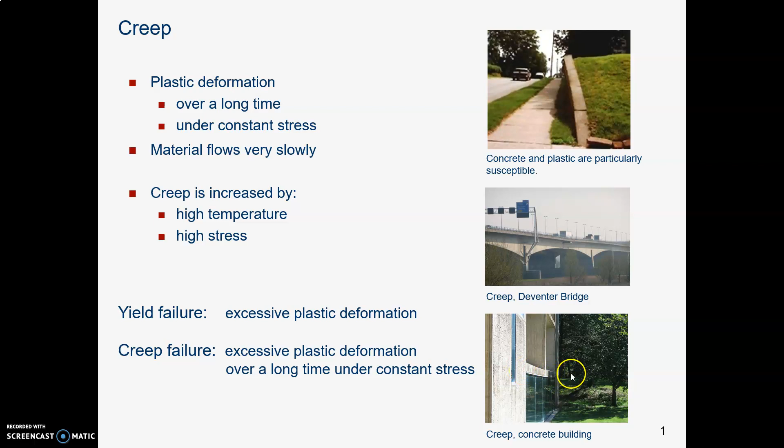So here is a photo of a bridge that is experiencing creep in the middle of the span. Here is a building with a concrete slab that is experiencing creep in the middle of the span.

An issue is thinking about what we're doing when we pre-stress a beam or we post-tension a beam. We're putting positive camber in that beam so it will kind of bow upward so that when we put a load on it, the bottom of the beam will be bent downward. The bottom of the beam will be in compression, which concrete likes, and all will be well.

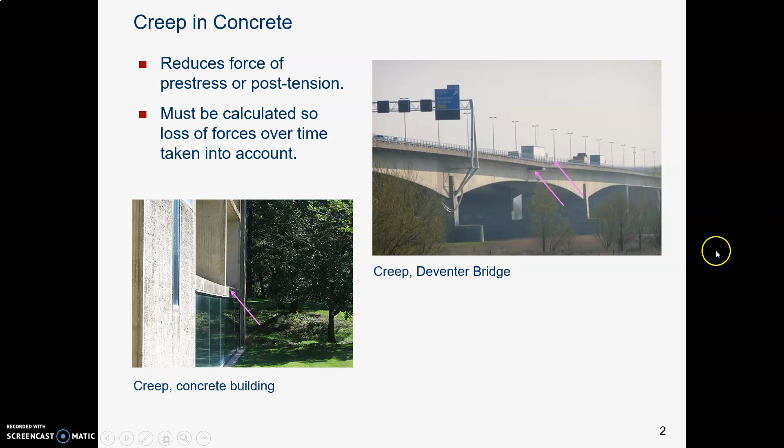Well, when you start to get creep, that sagging can counteract the good things that the pre-stressing or the post-tensioning did. And so your engineer will be calculating what is the likelihood of creep, how much of it will happen, and they will calculate how to offset the effect of the creep so that it doesn't overcome the good work that the pre-stressing and post-tensioning does. That's part of civil engineering, which is an interesting field.

Well, we're talking about reinforced concrete. So concrete is bad in tension and it cracks at the bottom. That's why we put in rebar. Also, as the beam is bent, it experiences shear in the middle of the beam, and we saw on a previous day that when things shear, they tend to shear at a 45-degree angle, and so engineers and then contractors locate their reinforcing bar to counteract those 45-degree shear impacts.

The most efficient way to handle that is with rebar, reinforcing bar, that's bent at a 45-degree angle, because that is exactly at 90 degrees to those shear lines. However, contractors often put in vertical stirrups of rebar spaced closer together where the shear is going to happen, because it's just easier to make. You know, that 45-degree is kind of sophisticated and you have to be careful. These stirrups, you can just bend a bunch of 90-degree angles and it's easier and therefore more economical, because we pay for labor by the hour.

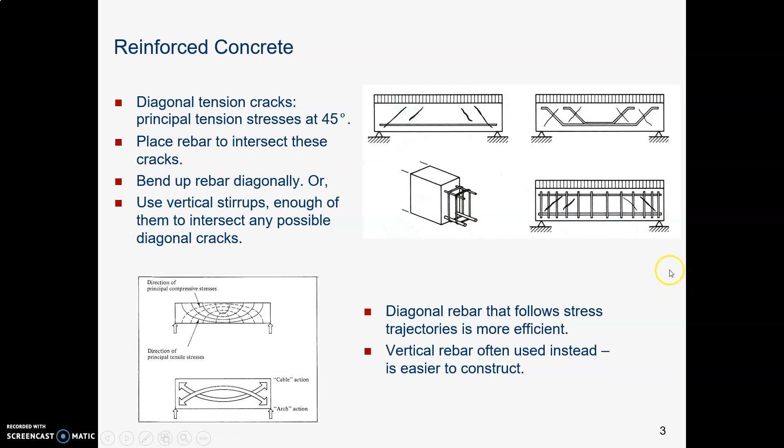It's interesting to think about how concrete is brittle and steel is ductile, thinking back on a previous day when we talked about being brittle and ductile. And what we said then was that concrete is a brittle material, which means it gives no warning of impending failure. A brittle material just goes from fine to totally broken. Dry spaghetti, concrete, brittle materials like that, no warning.

Ductile materials like steel will yield first. They will have a yield failure, so they've passed their elastic limit, they go into plastic behavior, so now they're stretching out and they're not going to come back. They're in plastic mode, and that means you get large deflections, you get warning of impending collapse, so you know something is wrong before the thing totally falls apart.

And the reason for talking about that here is just to note that engineers are aware that if they put in too much rebar, then the rebar will hold up fine. The concrete, the brittle material, will be the first thing that fails, and it will just totally come apart with no warning because it's a brittle material.

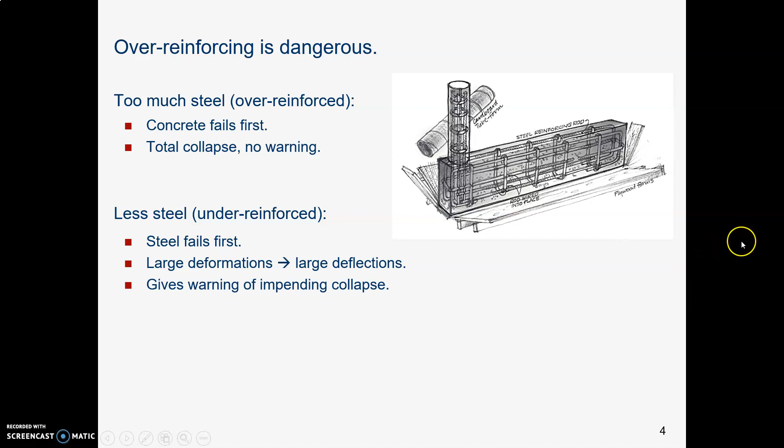The steel, it's a ductile material, and if you do not use enough steel, well, that's bad because your beam will fail by sagging too much, but at least you'll know that something is happening. So engineers carefully calculate exactly how much reinforcing bar should they put in a given beam.

Then, to review what we looked at in the previous set of slides, here are some drawings from Lease Crutcher Lewis of the construction of the LCC downtown campus building. Here is a floor plan at the second floor, level 2. This is the reinforcing plan now, so they're showing us where the rebar will go in place. And notice again here are the bubbles for the grid lines, D, E, F, 1, 2, 3, and so forth.

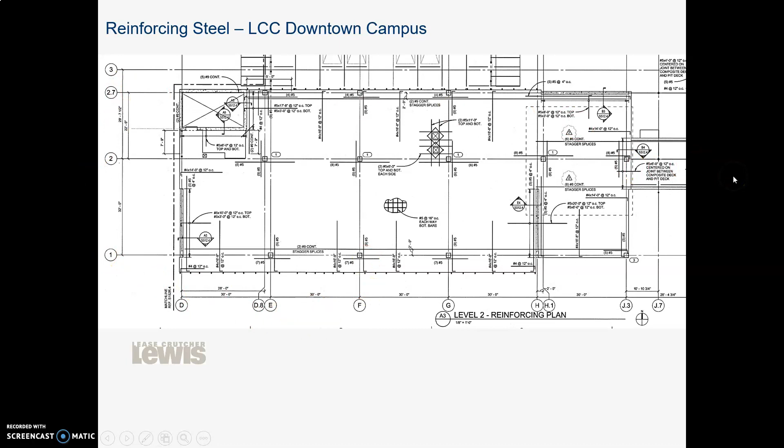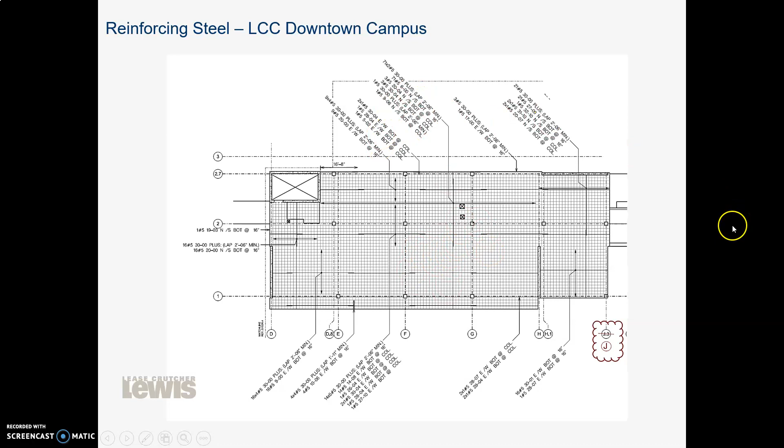Here's another plan showing, so this one just showed a glimpse through the concrete. Here's a plan showing all the rebar and lots of details. And this would have been drawn by a drafter. Then here is the actual rebar in place, and I don't know if you can see, but these bars are attached together with these ties.

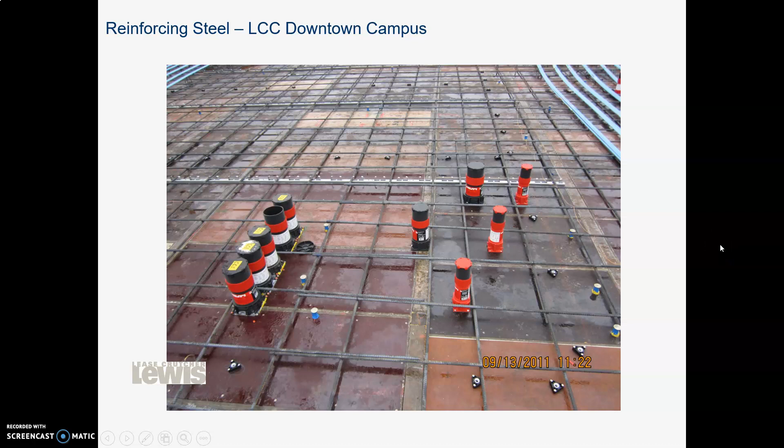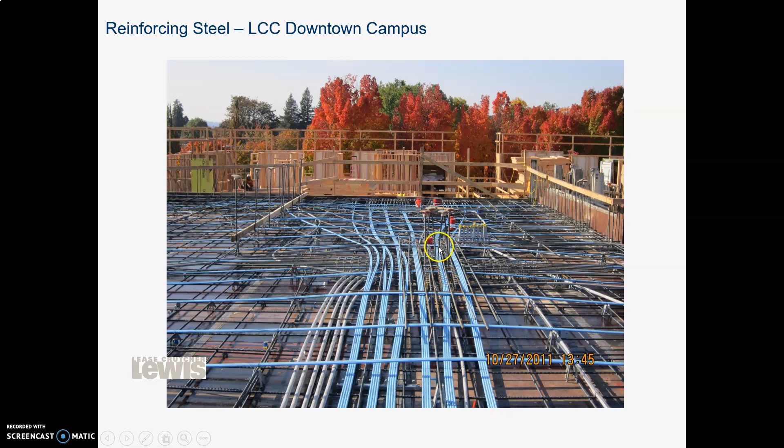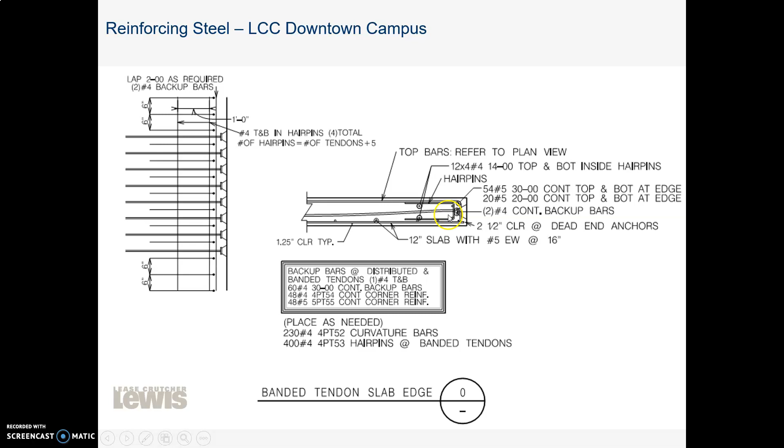And here is a close-up of the rebar that has been formed at a 90-degree angle. And from what you know about moment of inertia, you know that this 90-degree angle is adding stiffness to the shape of the material. And an engineer has calculated this and has figured out where to put these stirrups for reinforcing the edge of the slab where the shear will be the greatest.